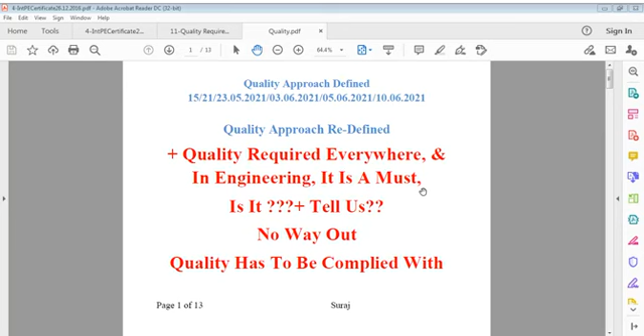It's not simply qualification, it's not simply compliance, it's not simply that. I am particularly interested in explaining civil engineering, because I have noticed, and it's evident, that civil engineering is gigantic, divergent, a professional field which does everything. Of course it takes time, but it does everything. If you have control of budget, if you have technology or you develop technology, and you have skilled and semi-skilled people with you, it changes the scenario.

The job of civil engineering has many levels, not levels described for designations, but different levels of thinking. We should remember, particularly civil engineers, that we are natural engineers, natural born engineers. The reason is we deal with all natural materials, we deal with all natural agencies. Your materials that you use are all natural. Some people call them raw form, I don't call it raw form, but natural form. You can take whatever material and see what it is.

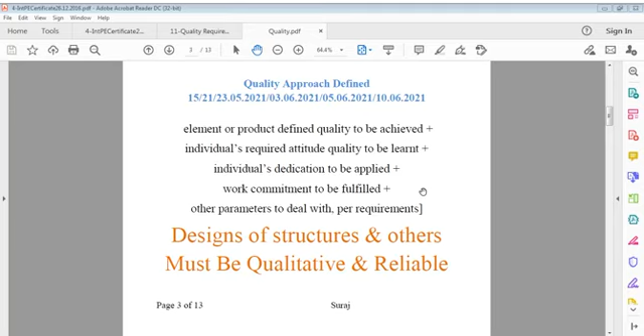Design of structures and others must be qualitative and reliable. It's the designer's responsibility, that's true, but implementation is not the designer's responsibility. That is also very important, because designs keep you thoughtful. You'll be very happy if you do it right. And if you don't do it right, it's very much problematic. Very much problematic.

There are various stages in design. Of course, it's up to you to define. But it's not design alone that is sufficient. It's not design alone. It is construction also, it's part of design, because design means construction, and construction means how it is, what level of design you got. If you got elaborative design, coordinated design, if you are the best person, lucky person, you will feel doing that job without any problems, if that designer knows what's the requirement.

It's not simply construction, but it should be ease of construction as well. If I'm a designer, I have designed with full knowledge, I have designed compliance of all codes, there's nothing left I didn't relate to this, apply to that. That's great, that's great that you are master of your job. But that must also make mistake.

I'm not talking here mistakes or no mistakes. What I'm talking is that construction is related to design, and designs are done for construction. It may be architectural design, structural design, services design, all deal with construction. And without construction, well, I think design is meaningless.

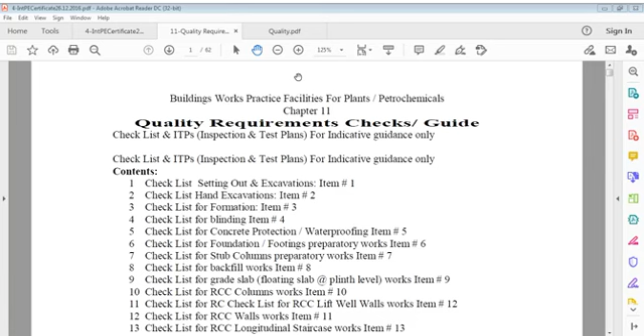There was a list I prepared, and you have seen that list. Again, I'm just showing you what is that: setting out, excavation, hand excavation, formation, blinding, concrete protection, foundation footings.

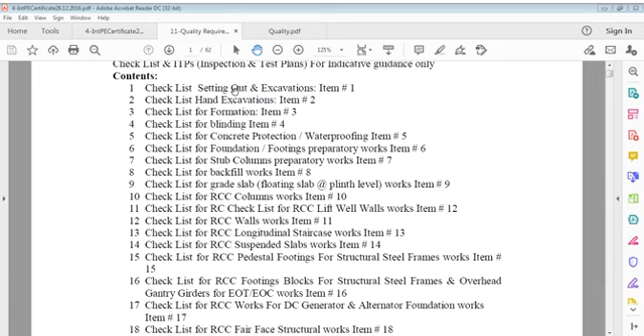Once you also defect your job, that's also not good. There are so many activities applied on structures, on all structures, not only buildings, and we have to learn about them something more - maybe text-wise, theoretically, or drawing-wise.

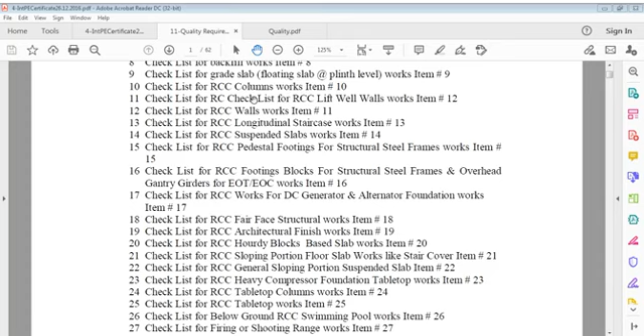How drawing is done must be made clear. Your knowledge is not limited - knowledge always keeps on increasing. Heights are important.

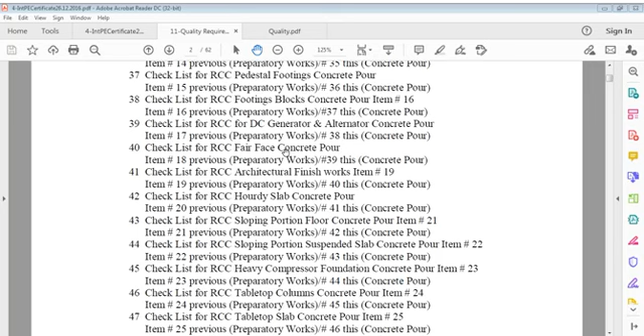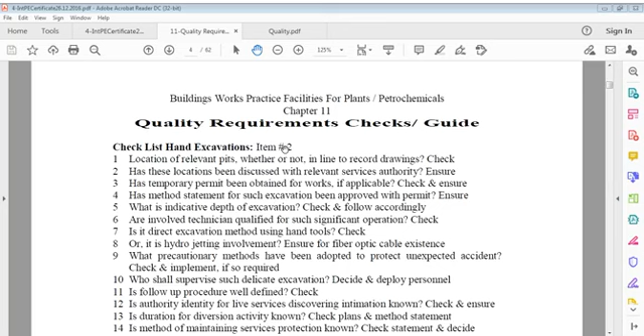I have gone through these activities many times. It happens. I thought to write some activities additionally and post them.

It was for, you can say, light pole foundation. Other one was for your manhole chambers, and also some talk on quality requirements.

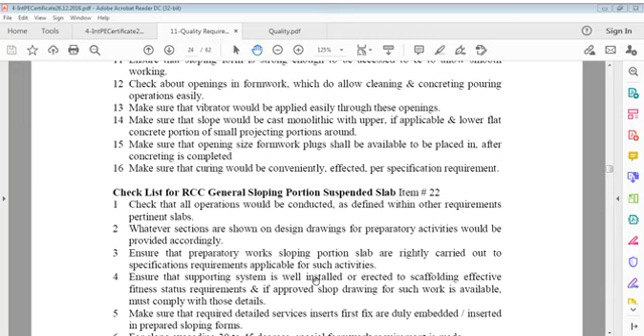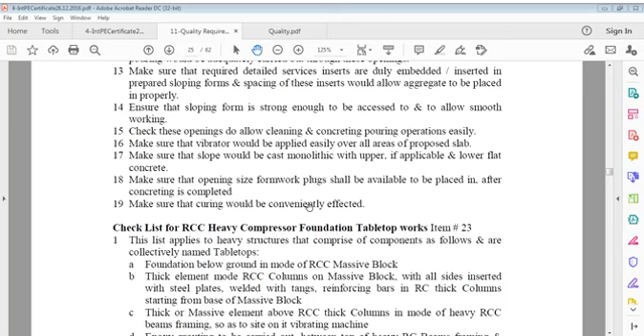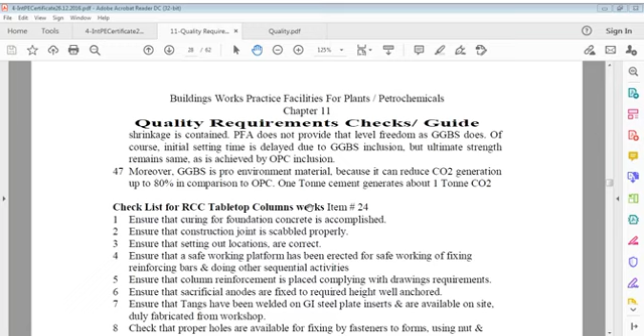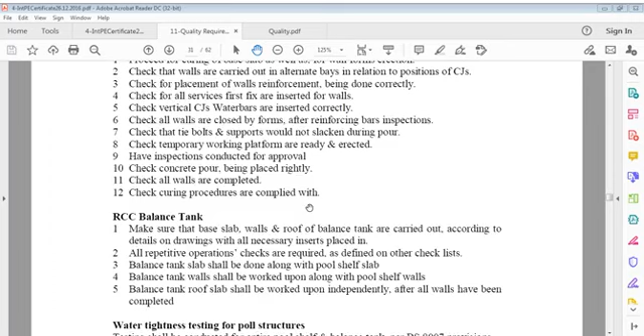Sometimes I talked of suspended slab, all that - it's a very important part. Sometimes we talked of heavy compressor foundations and their columns and tabletop. I'm showing you all this because I have done written work on this for better understanding, because sometimes what I want to say, your words don't support. We talked of tabletop, long item tabletop, swimming pool, and we talked of firing range as well, which is very army-based work for soldiers. This is also a very important element in our security.

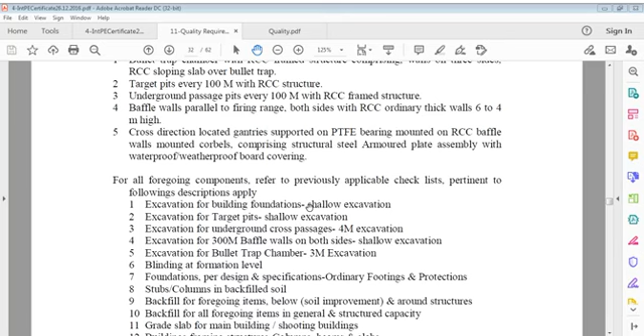These items which we discussed are very, very significant for reference. We went to light poles, which has of course recently been explained, but sometimes we have to explain in thoughts. Everything cannot be given in writing, but it's complex, not that serious. In an ordinary way to understand that, what is a light pole, first of all? It's street lighting, I'm not talking of something else. It's street lighting or lighting on roads, or very different kinds of lighting.

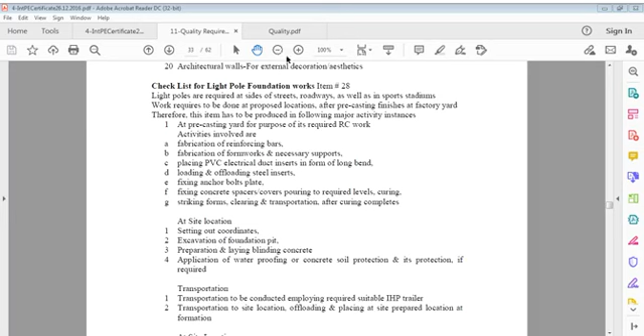We have to make a conception of how to do this work. It's a very important part. If you can chart out the best way, you should follow it. It's not simple alone, it's very, very important that we have to do. We have to reach to that level where we can say, this is our approach, this is our policy, and that policy must be adhered to. That policy should be a proven one after doing much work on that, and if that doesn't work, we should change our policy. Give it some time.

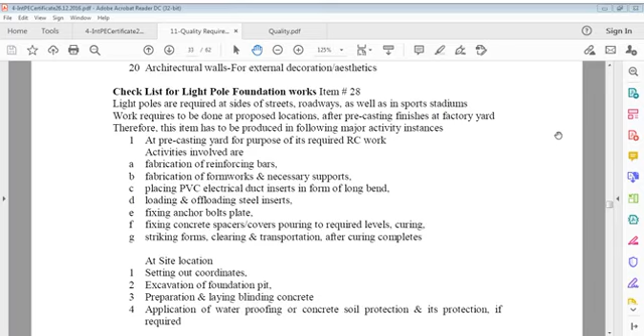After curing is completed and at site, it is setting out coordinates, excavation of foundation pit, preparation and laying blinding concrete, application of waterproofing or concrete, soil protection and its protection if required.

Transportation to be conducted employing required suitable IHP trailer, means indicative horsepower that is required for so many. You can suppose you are transporting 10 such poles, foundations. One is having say 3 tons or 4 tons, so you need 40 tons. Absolutely, that's another point.

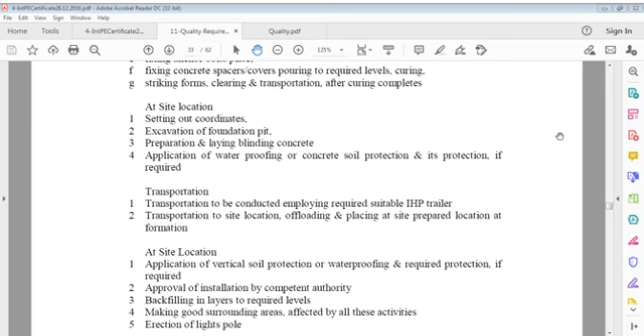Transportation, site location, offloading and placing at site prepared location at formation. For site location, application of vertical soil protection. Once you install it, once you place it on area, and application of vertical soil protection or waterproofing and required protection if required, approval of installation by competent authority and backfill in layers to required levels, and making good surrounding areas affected by all these activities, erection of light poles.

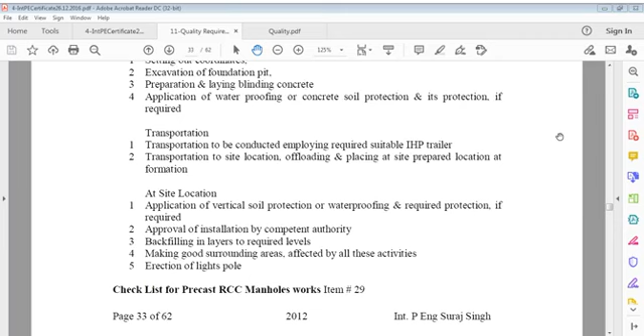So this is basics of that item. Then I go to much more important item. This electric pole, I think I had shown you, I remember. If not, I will try to show you. That's also important, so that you should not stay in dark. I think everything should be clear in profession. I'd like to find out if I have that.

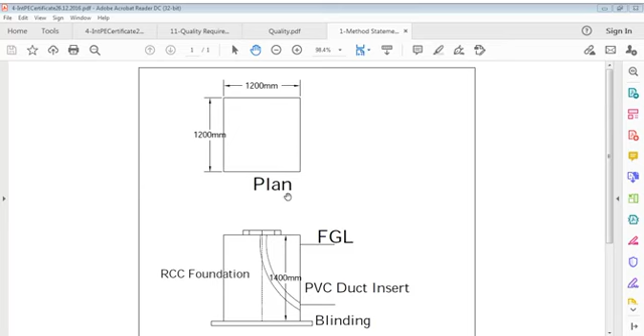It's 1.2 into 1.2. There's a PVC duct insert for electrical wiring, from ground, below ground cable to be taken up to light pole. There's a blinding below.

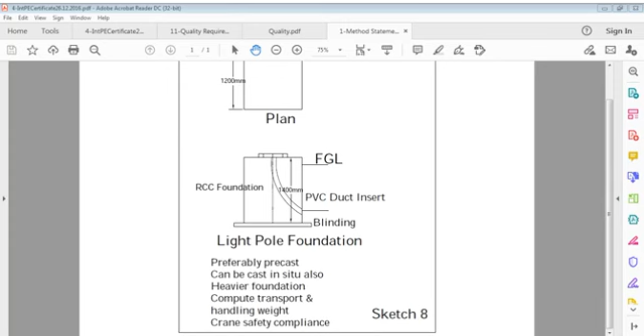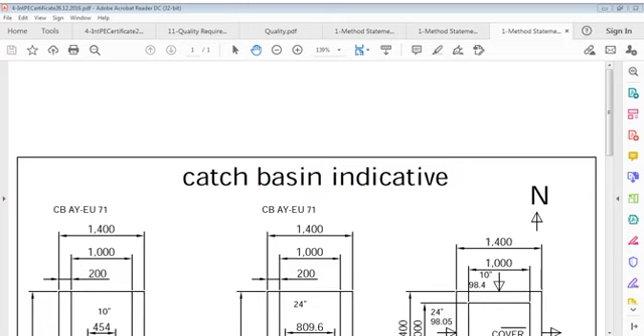So one is there, which I will discuss with you. This is light pole foundation. You have seen this.

Then I am showing you a very simple manhole. Manhole doesn't mean sewerage manhole, which we think so. There are many types of chambers, manholes. In utilities, we call it manhole because entry of a person is allowed through that cover. Manhole cover, in fact, it is called.

Manhole doesn't mean sewerage here in our country for public. Manholes are installed for going down for inspection, but that's not for civil alone. It's for many services - drainage, storm water, acid water, and so many others besides chemical water, acid water, catch basins, or open drains, ditches you call it. So many times. And in every such system - drainage line, sewer line, or other services as I mentioned - the whole system is collected at some point.

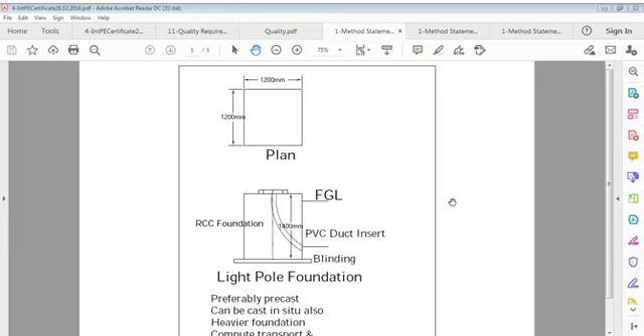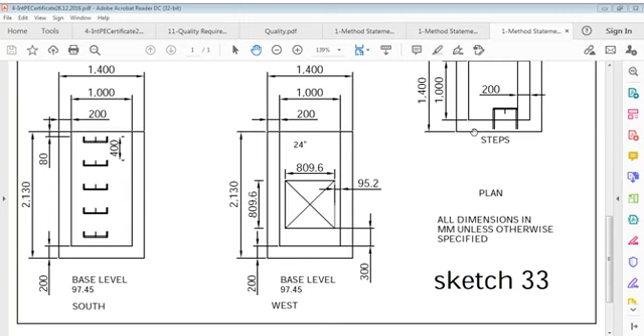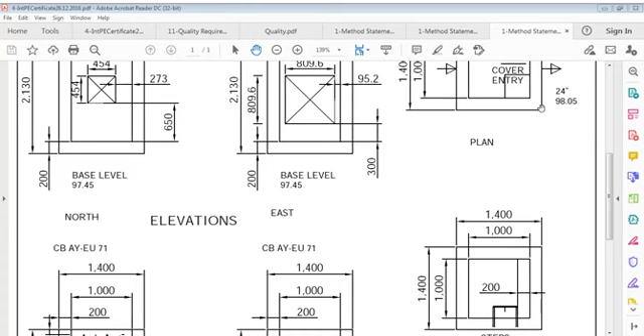So I'll now say what is manhole actually. Let us say what is manhole. I explained this to you yesterday also. Maybe you remember that. I just say repetition for further clarification - there's one plan showing inlet and exit, inlet and outlet pipes. There are elevations of each one. It's showing box outs, block outs to be fixed for various pipes. Various pipes, you can see these are done, and then where steps come in, these block outs are filled with installation, filled with grouting pipes.

So if you see the cover of this, you will find a cover which is also very known to everyone. Cover is known to everybody, and cover means precast cover, which can be placed on site as well, or it can be cast on site also. If you can cast on site, you can cast on site. It's not a big issue - small shuttering, only small sides, reinforcement, and manhole cover with that.

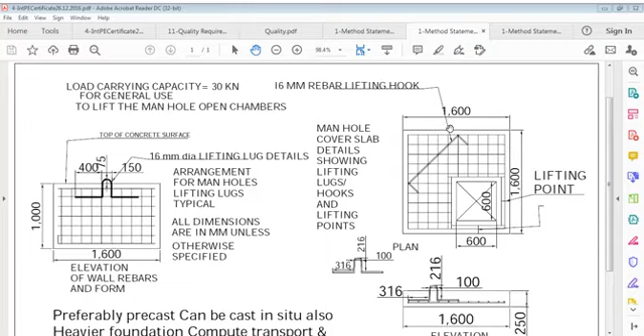Manhole cover slab showing lifting lugs. Preferably precast, can be cast in situ. Also heavier foundation, compute transport and handling, weight, crane safety.

So my dear, this is a sketch of the cover. It's not very complicated, it's easy, and you can understand it very well. Its thickness is 250 mm. This is typical, it doesn't matter if you have that one, because it's a heavy duty manhole and shall be placed in streets or on service roads, below service roads. So it's stronger than an ordinary one. If it's not on a street, then we have to think otherwise.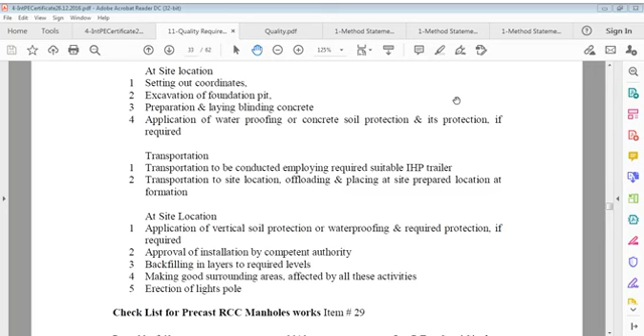So that is the phenomenon of this. So what we have to do in this case, if you see that - what is the statement of this, method statement of this says. It says...

That these are required on all mega projects. These manholes, all projects, even in housing - it's not a mega project, but it's required. It's required in any complex which is not a mega project. But there are a number of limitations there. On those projects, there will hardly be a sewer line, or you may say septic sewer line, and nowadays there's no major issue of rainwater because much is collected for harvesting.

But when you see industrial projects, they are very significant for the economy. Even if it's not directly involved, it may have some effect on the economy. On those industrial projects, so many utilities are used, utilities are constructed. Well, I think sometimes it's even difficult to understand drawings.

Sometimes, because many services are shown on the same drawing. But that is true, you can't avoid that. But the study becomes tedious. That study is very important to be conducted, but it requires concentration because there are so many services shown in one drawing, or so many drawings are available for different services. So you can say coordination becomes a very important issue in those services. Even if they are on the same drawing or shown in different drawings, we have to coordinate both.

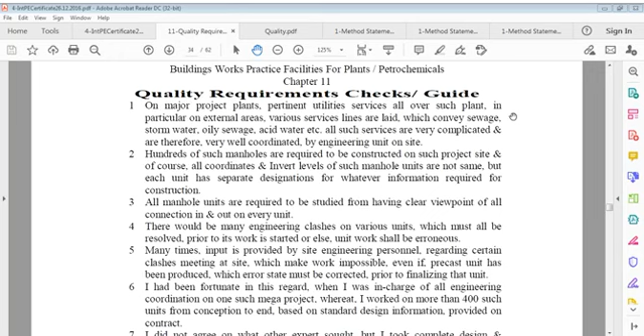Hundreds of such manholes are required to be constructed on such project sites, and of course all coordinates and invert levels of such manhole units are not the same, but each unit has separate designations for whatever information is required for construction. All manhole units are required to be studied from a clear viewpoint of all connections in and out of every unit. There would be many engineering clashes on various units, which must all be resolved.

Prior to the work starting, which must be resolved, or else the unit work shall be erroneous. Many times input is provided by site engineering personnel regarding certain clashes meeting at site, which make work impossible even if the precast unit has been produced, which error state must be corrected prior to finalizing that unit.

Now, I've been fortunate in this regard, when I was in charge of all engineering coordination in one such mega project, where I worked on more than 400 such units from conception to end, based on standard design information provided in the contract.

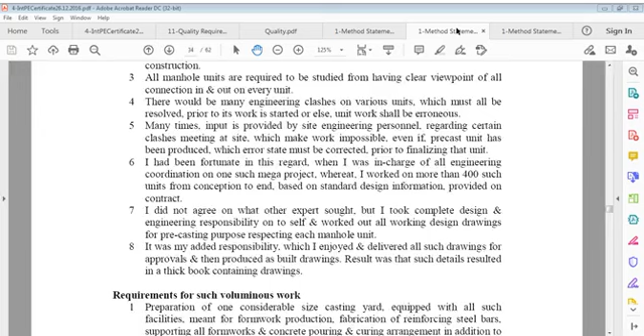This is the drawing which I showed to you, only very nominal. This is a very, very small part of that drawing. There are so many here. I'll show you all one day when I have time, because PDF takes time. I'll show you maybe on AutoCAD, but the problem is it's live. If you want to use AutoCAD, you have to show AutoCAD all the time. So that's where I think we feel quality problems in this.

I can't continue. I have to continue with one format only, and that format is this. So let's say then the requirements for such voluminous works, I'm going to that. What's the requirement of this? What's the voluminous work we have to do in this? That's also an important point.

Now, preparation of one considerable size casting yard, that's where you have to precast. It should be some convenient place. Meaning you have to temporarily organize that part for the purpose of working on all these items: formwork, steel fixing, pouring, curing, circulation of traffic. I mean to say, trailers should come in and go out, or whatever your transportation means for carrying these to various locations on site. That area must be accessible.

All design was done. See, the circulation yard was prepared on papers, and then it was approved and given to site guys. Of course, it was a contribution by site, in the best way they wanted, by their own approvals, by their own agreements. Then they have to start. Meaning there must be access for the transit mixer, though a concrete pump is not required, but in case it is required, there should be a way. Transit mixer should come there, then trailer should come there, crane should come there, all that.

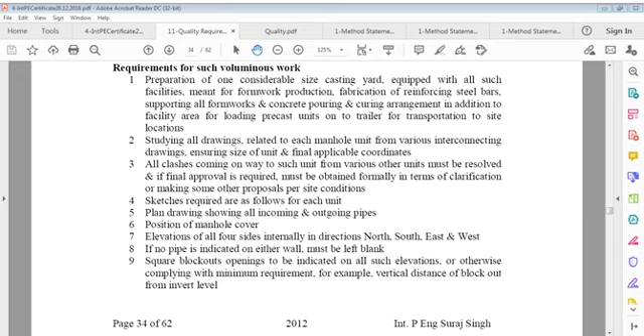Then it says these openings would be grouted on site once the manhole unit is installed and pipes connected. Each such drawing with all confirmed working sections and plans for each unit are issued to the site engineer for working on precasting.

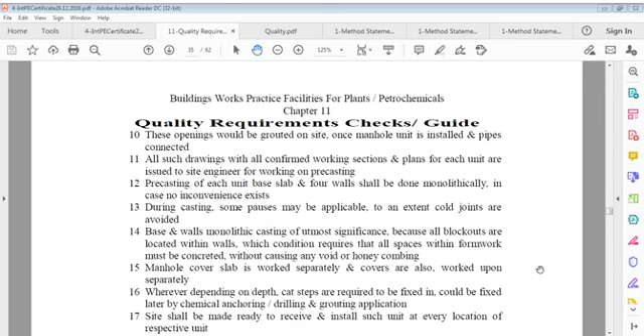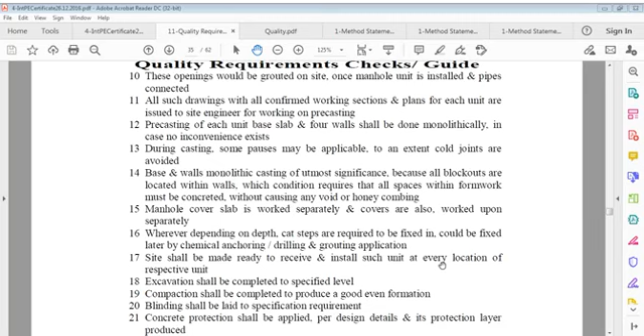Precasting of each unit's base slab and 4 walls shall be done monolithically in case no inconvenience exists. During casting, some pauses may be applicable, to an extent cold joints are avoided. Base and walls monolithic casting is of utmost significance because all blockouts are located within walls, which condition requires that all spaces within formwork must be concreted without causing any void or honeycombing.

The manhole cover slab is worked separately, and covers are also worked upon separately.

Covers are also worked upon separately. Wherever, depending on depth, cat steps or steps are required to be fixed in, they could be fixed later by chemical anchoring or drilling and grouting application.

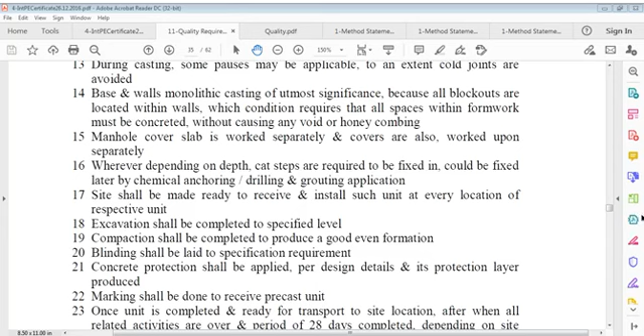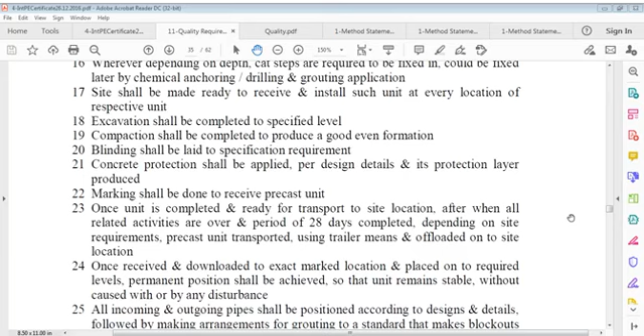Site shall be made ready to receive and install such unit at every location. Excavation shall be completed to specified level. Compaction shall be completed to produce a good even formation, the purpose of which is even formation.

Blinding shall be laid to specification requirement. Concrete protection shall be applied per design details and its protection layer produced. Marking shall be done to receive the precast unit, on the blinding, within which your manhole or unit shall be placed, and you must make sure it is completely leveled. That's important; if it's not leveled, you have to make it leveled, by grinding or whatever means. It's not written here, but it must be.

Once the unit is completed and ready for transport to site location, after all related activities are over and a period of 28 days is completed, depending on site requirements, the precast unit is transported using a trailer and offloaded onto the site location.

Once received and downloaded to the exact marked location and placed onto required levels, a permanent position shall be achieved so that the unit remains stable without being caused to move by any disturbance. All incoming and outgoing pipes

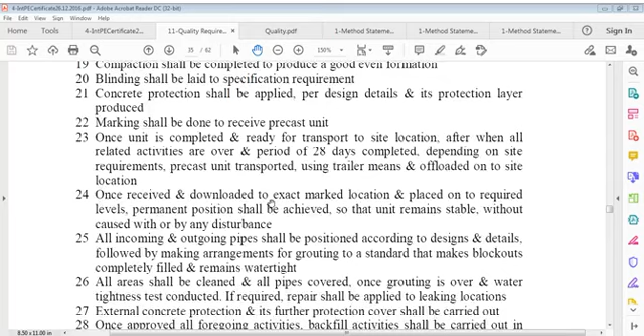Manhole top slab work shall be carried out per details. Precast manhole cover shall be placed on its designed opening. This is a very brief written statement, not a detailed one, but enough to understand, because it depends upon how I do it, and it is not explanatory all the time. That's also an important point.

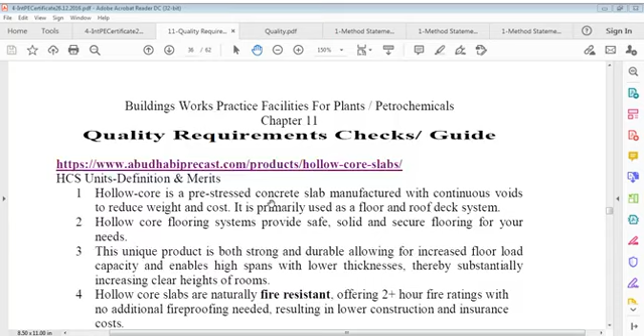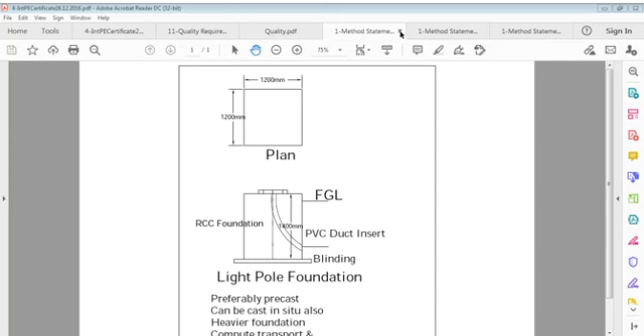So I have discussed repeatedly light pole foundation and manholes organized in the precasting way, and I'd like to close this sketch of the light pole. There's no meaning else to be done, and I also close this method statement of manhole cover, as you see on the screen. Now the quality file is there.

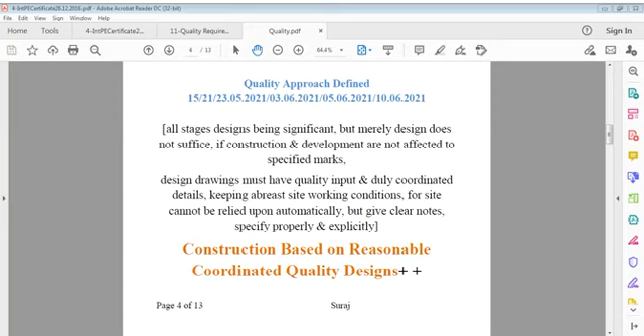I'm going to do something different now, a very important one. This is a file from Abu Dhabi precast dot com, about hollow core slabs.

Just written on this hollow core slab - you know what is hollow core? It is a pre-stressed concrete slab manufactured with continuous voids to reduce weight and cost. It's primarily used as a floor and roof deck system.

Hollow core flooring systems provide safe, solid and secure flooring for your needs. This unique product is both strong and durable, allowing for increased floor load capacity, and enables high spans with lower thicknesses, thereby substantially increasing the clear height of rooms.

Hollow core slabs are naturally fire resistant, offering 2+ hours fire ratings with no additional fireproofing needed, resulting in lower construction and insurance costs. They are sound resistant, providing an STC rating of 50 or more, being very economical and providing unlimited design flexibility, making it possible for hollow core to work with unusual building shapes and cantilevers.

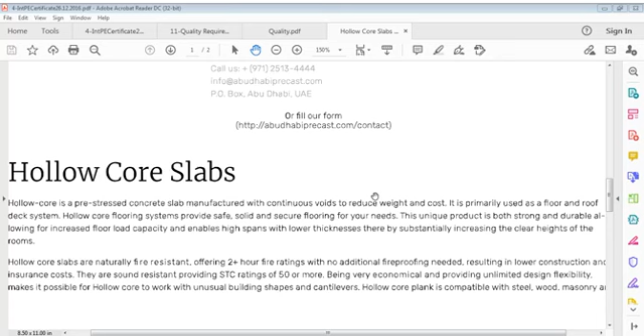Hollow core plank is compatible with steel, wood, masonry and other precast products. Hollow core is manufactured indoors while the site is being prepared, and installation begins as soon as the site is ready.

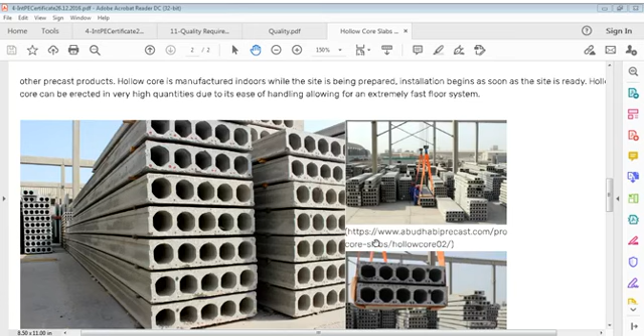Hollow core can be erected in very high quantities due to its ease of handling, allowing for an extremely fast floor system.

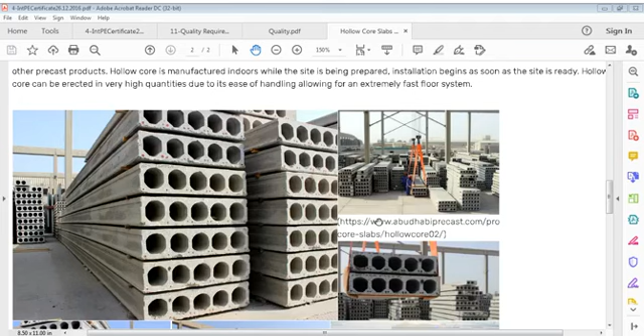You can see this sketch, this photo. Whole yard is here, some close pictures. And these are of course much developed now. It was not developed that much before, but now it's better developed, much advanced.

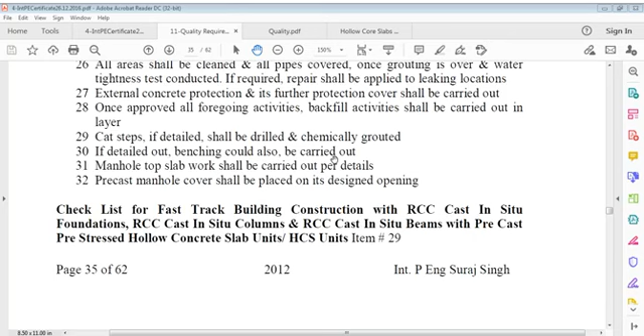So what I said, when I say checklist for fast track building construction with RCC cast in situ foundation, RCC cast in situ columns, RCC cast in situ beams with precast, pre-stressed hollow concrete slab units. Hollow concrete slabs are HCS units. This is what we are talking about.

This is the URL of this material site, Abu Dhabi precast dot com. I just referred it because it's available online.

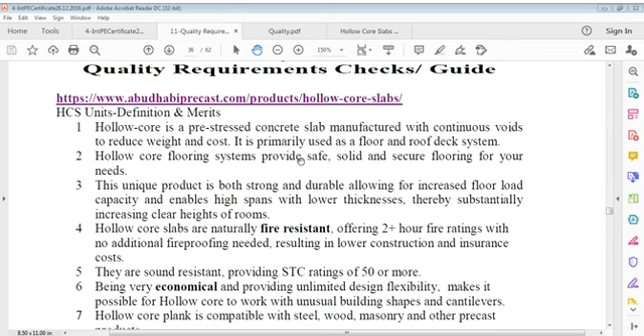Now, HCS units definition and merits, it is also given by this site. I'm just using that. As I stressed just now, hollow core is pre-stressed concrete slab manufactured with continuous voids to reduce weight. I already gave that just now, so there is no meaning to repeat it.

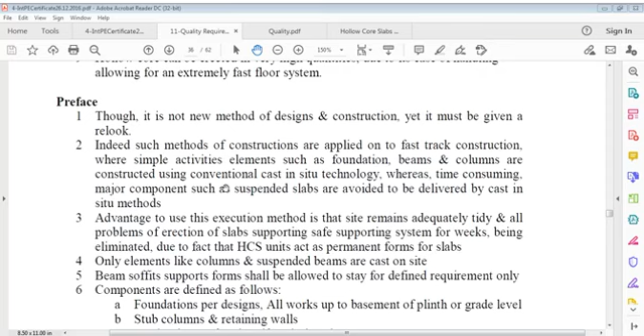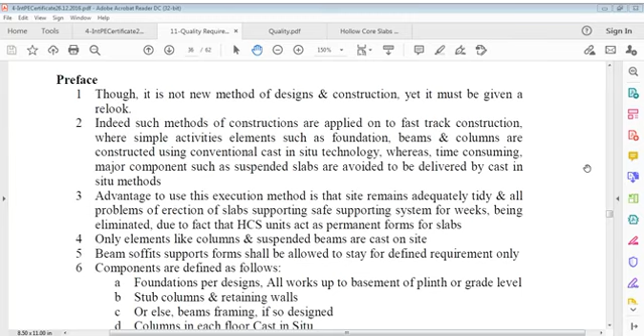Now what I am stating here is that, though it's not new, as a method of design and construction, yet it must be given a relook. Indeed, such methods of construction are applied to fast track construction, where simple activities and elements such as foundation, beams and columns are constructed using conventional cast in situ technology, whereas time consuming major components such as suspended slabs are avoided to be delivered by cast in situ method.

The advantage of using this execution method is that the site remains adequately tidy, and all problems of erection of slabs and supporting safe systems for weeks are eliminated, due to the fact that hollow core slab units act as permanent forms for the slab. Only elements like columns and suspended beams are cast in situ. Beam soffits and supports forms shall be allowed to stay only for the defined requirements.

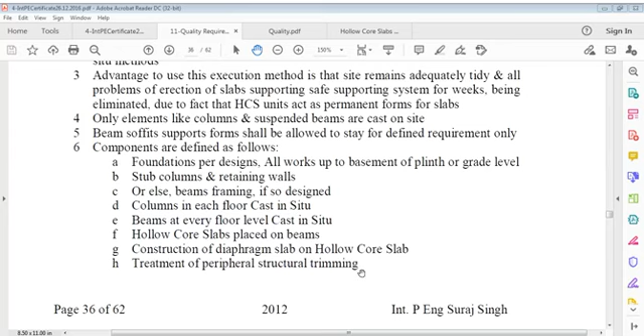Components are defined as follows: Foundation per designs, as you have designed it to do. All works up to basement or plinth or grade level, stub columns and retaining walls, or beams and framing if so designed. Columns at each floor cast in situ. Beams at every floor level cast in situ. Hollow core slabs placed on beams. Construction of diaphragm slab on hollow core slab. Treatment of peripheral structural trimmings.

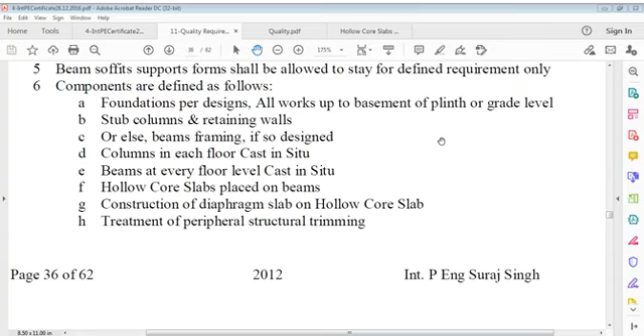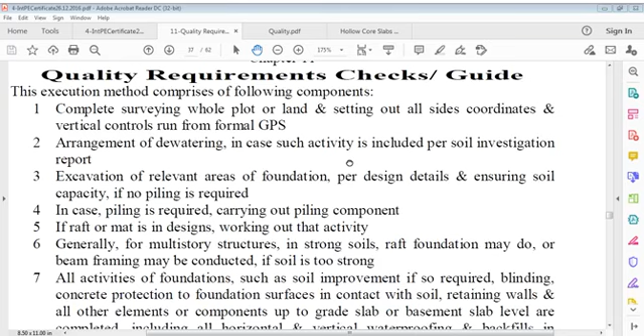Now in execution, this execution method comprises the following components, which is very important. Complete surveying of the whole plot or land, and setting out all site coordinates and vertical controls, run from formal GPS, global positioning system.

Arrangement of dewatering in case such activity is included, per soil investigation report if it is required. Excavation of relevant areas of foundation as per design details, ensuring soil capacity if no piling is required.

In case piling is required, carry out the piling component. If a raft or mat is in the design, work out that activity. Generally, for multi-story structures in strong soils, raft foundation may be used, or beam framing may be conducted if the soil is too strong.

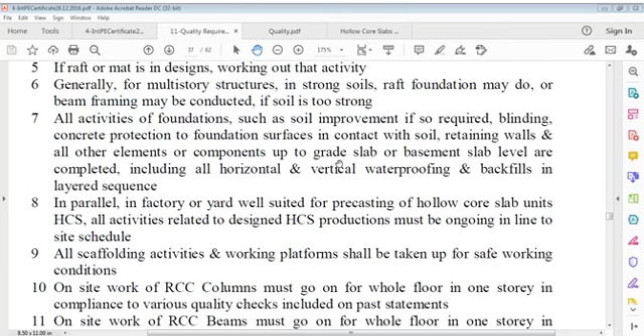In parallel, in the factory or yard well suited for precasting of hollow core slab units (HCS), all activities related to design and HCS production must be ongoing in line with the site schedule. All scaffolding activities and working platforms shall be taken up for safe working conditions.

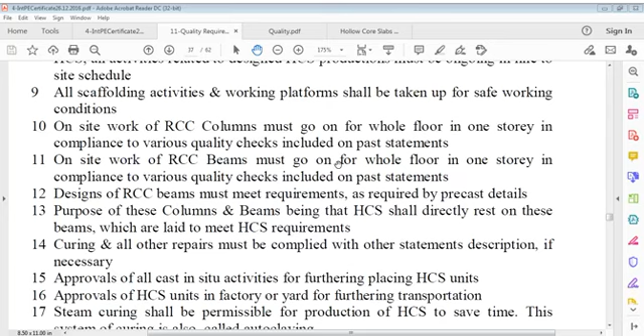On-site works of RCC columns must go on for the whole floor in one storey, in compliance with various quality checks included in the past statements. On-site work of RCC beams must similarly go on for the whole floor in one storey, in compliance with quality checks. Designs of RCC beams must meet requirements as required by precast details, the purpose being that HCS shall directly rest on these beams which are laid to meet HCS requirements.

Curing and all other repairs must be complied with, per other statements and descriptions if necessary. Approvals of all cast in situ activities for furthering the placing of HCS units, and approval of HCS units in the factory or yard for furthering transportation, and if some repair is applied, curing and all other repairs must be complied with as per other statements. Steam curing shall be permissible for production of HCS to save time; this system of curing is also called autoclaving.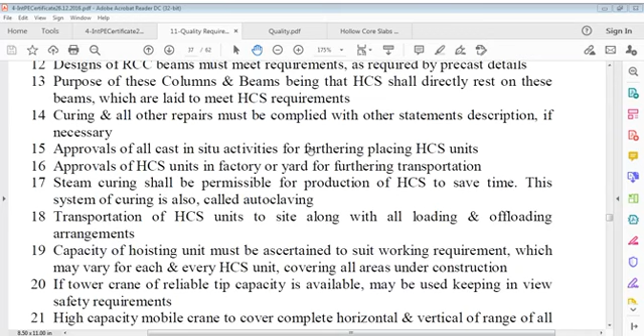This curing system is also called autoclaving. Transportation of HCS units to site, along with all the loading and offloading arrangements. Capacity of the hoisting unit must be ascertained to suit working requirements, which may vary for each and every HCS unit, covering all areas under construction. If a tower crane of reliable tip capacity is available, it may be used, keeping safety requirements in view.

Now, high capacity mobile crane to cover complete horizontal and vertical range of all HCS units would be required for raising and placing each and every unit.

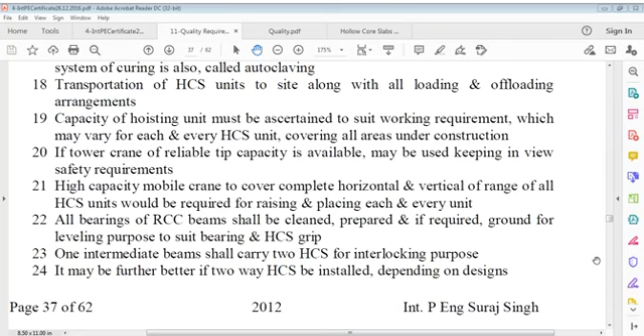All end trimming effects shall be prepared per structural designs to ascertain that diaphragm action could be achieved among cast in situ beams.

Activities to prepare all items of cast in situ diaphragm slab shall be carried out. It's very important. All end trimming effects shall be prepared per structural designs to ascertain that diaphragm action could be achieved among cast in situ beams.

HCS units of cast in situ diaphragm, cast in situ concrete, shall be thinner than usual or conventional cast in situ slabs. It may be 60 to 100 mm depending on requirements, in case some inserts may be added.

Activities to prepare all items of cast in situ diaphragm slab shall be carried out. Inspections shall be conducted for combination of all combined items or components to make sure that no movement is done and stability and integration are affected.

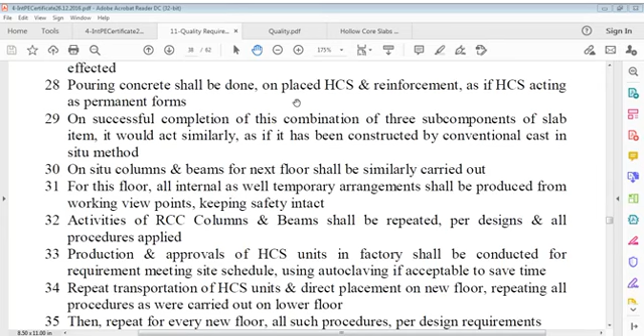Activities of RCC columns and beams shall be repeated per designs, and all procedures applied.

Production and approvals of HCS units in factory shall be conducted for requirement meeting site schedule, using autoclaving if acceptable to save time. Repeat transportation of HCS units and direct placement on new floor, repeating all procedures as were carried out on lower floor.

Then repeat for every new floor all such procedures per design requirements.

This was brief on your precasting of this slab. Well, I think we have advanced well.

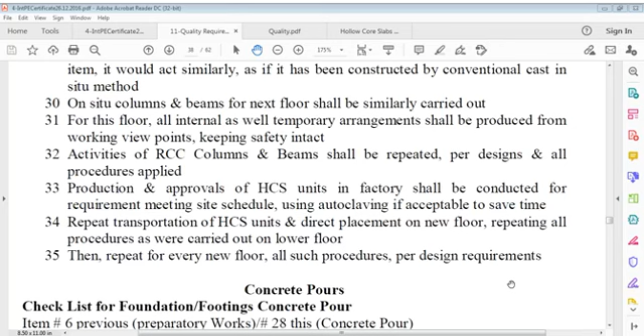I can show you this also again. This is material. I am not ready with the sketch of this yet. I wanted to make one sketch showing all these units placed on beams, but I have not done that yet. I'll try to do that later, because that sketch is not ready with me. I will make it again.

I'll make it. Though you are clear that you have to construct beams and columns only as far as site is concerned, cast in situ technology is concerned. You have to produce beams and columns and beams framing, and all. Then you have to keep these HCS hollow core slabs on beams. How you design that so that structure will work as monolithic.

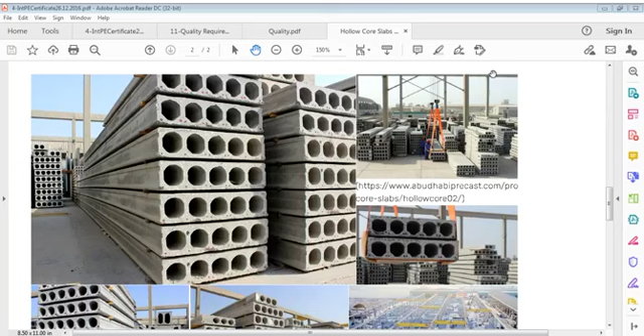So this is a very important method. Your material can say it's not, maybe many of you have experienced that. I dealt with this material as far as quotations were concerned, because I had to include this in some bid. And I studied that method statement, but they try to say, those experts of this manufacturing company, and I had to undergo that, how they do it. And it's well done in that case, but we did not get the job. But getting the job is different aspect. Question is what was our attempt towards this. That is important part of, and only that you can see here also.

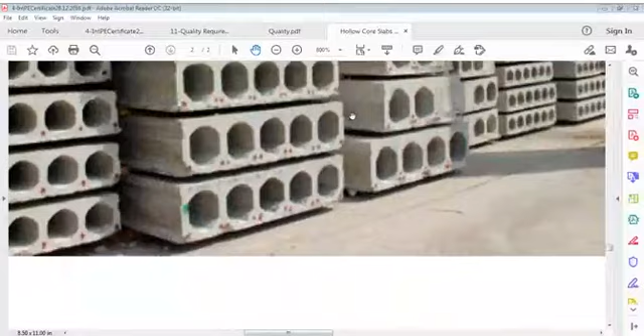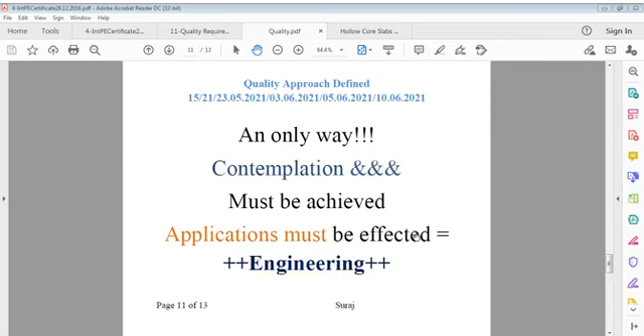I think on today's assignment, I'm a little tired. I think you got me. It's at random sometimes. I give, for example, this quality talk. This all covers what I said. All these factors come into this file, and that is important. Means if we establish quality in our culture, in our working, really speaking, we shall be a different world.

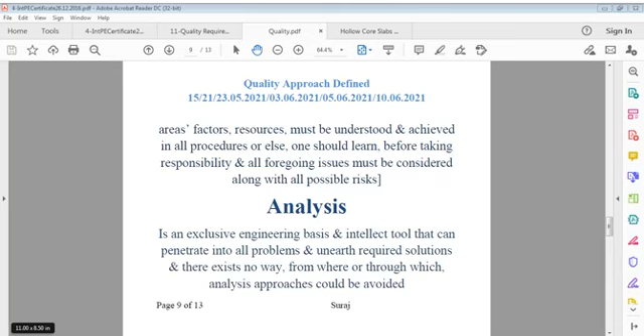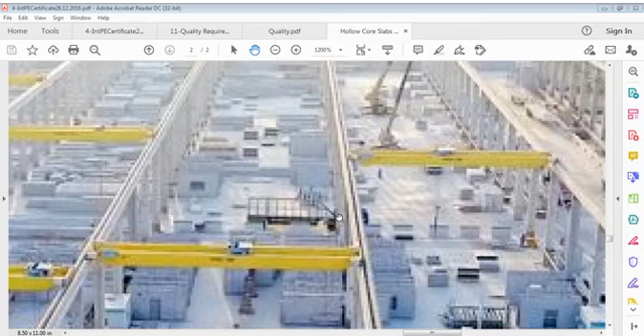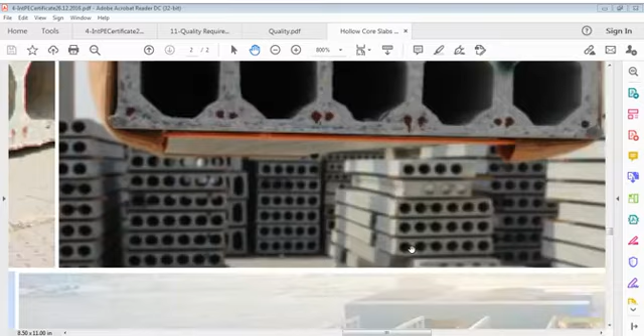I'm just browsing it for you so that you can know a little better. It's a big factory. I think it's time.